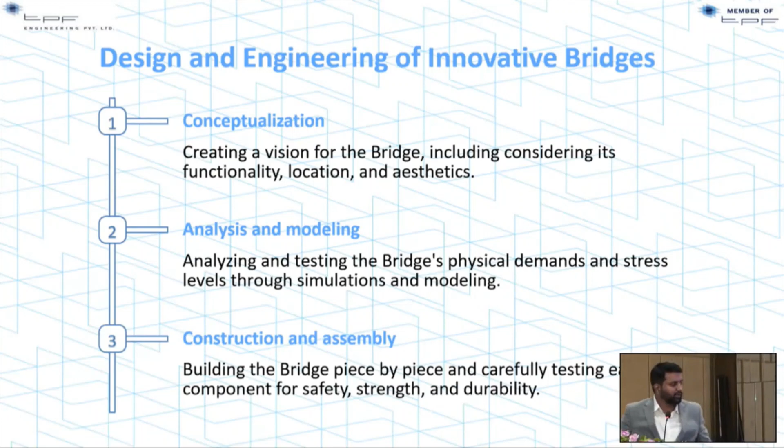Analysis and modeling is something a design engineer will start with an FEA model. We do the analysis and modeling, and consider how construction-friendly the design can be. That is the most important thing for a design engineer.

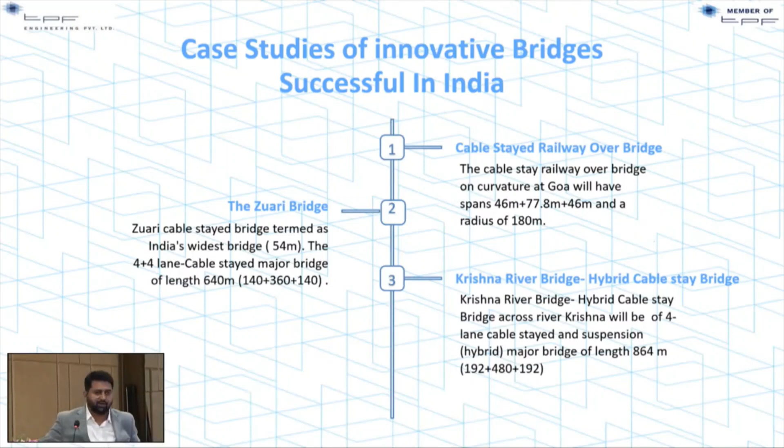So I will present 3 case studies successfully completed in India. The first is the Cable Stayed Railway Overbridge in Goa. The second is the Zuari River Bridge. And the last is something which has never happened in India, and we are the ones who are going to bring this technology to India.

For this innovative bridge, the client came to us with the problem of a live running track below and a first level corridor. They wanted to connect the southern part of Goa to the northern part with a ramp. So we came up with the innovative proposal of a cable stayed bridge. Any design engineer will understand that designing a bridge on a curvature is very difficult. We took up this challenge, and the bridge was constructed on a radius of 180 meters.

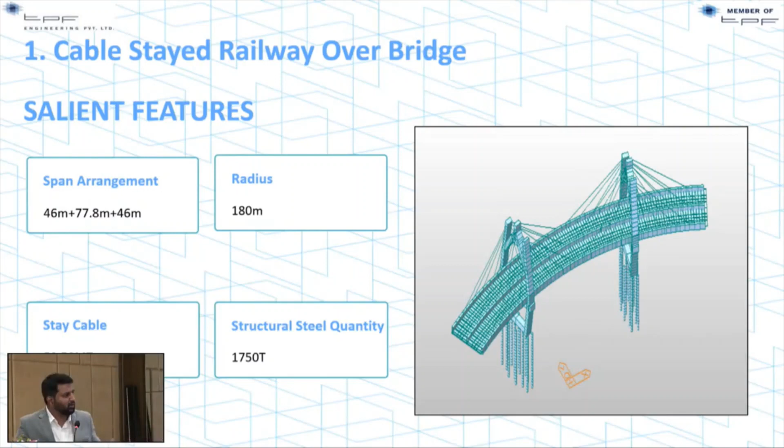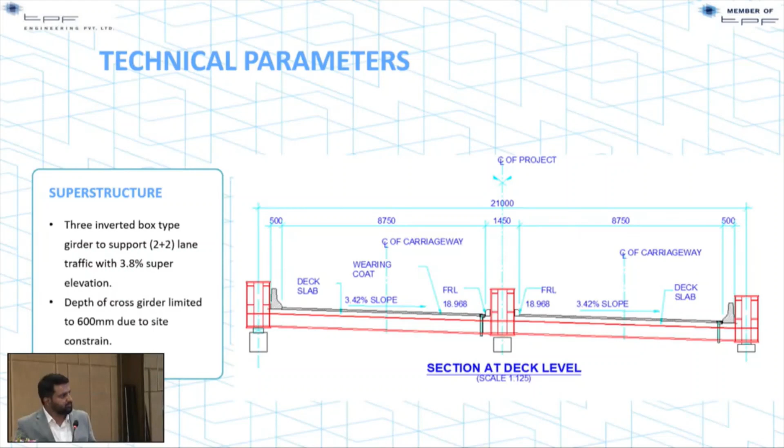The structural steel quantity was about 2,000 tons. From the aesthetic or innovation point of view, we provided a namaste shape to the pylon, which is a kind of pier. This is how the deck of the bridge was designed. Anchors are the most important parts of a cable stayed bridge, where the cables transfer the load from the anchor to the superstructure and then the substructure.

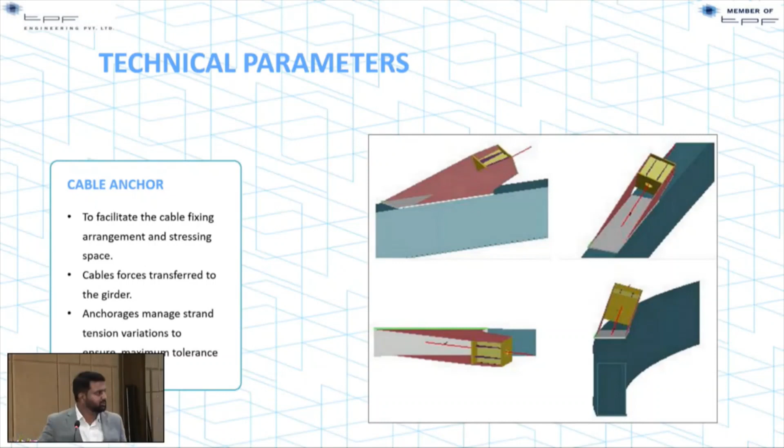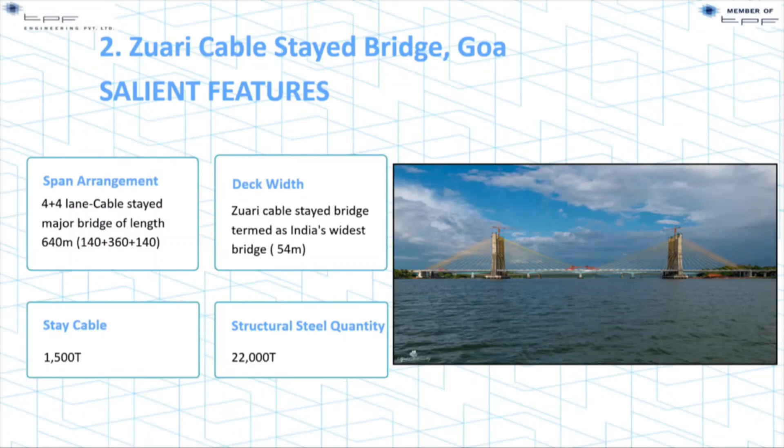the distance between the two pylons is about 360 meters. And the total length of this bridge is about 640 meters. So the structural steel quantity was about 22,000 tons, and the stay cable quantity was about 1,500 tons. The construction methodology, for a design engineer, the construction stage forces are very important. So due consideration was given to the technical parameters such as deflection, the structural steel weight, and the panels.

So the unique feature is that we were actually consultant on this project, but during the construction of the project, COVID happened, and the design consultant who was actually supposed to design this bridge was from Europe. He could not come back to India for completing the design part. So the Ministry of Road and Transport expected us to complete this bridge with the remaining design.

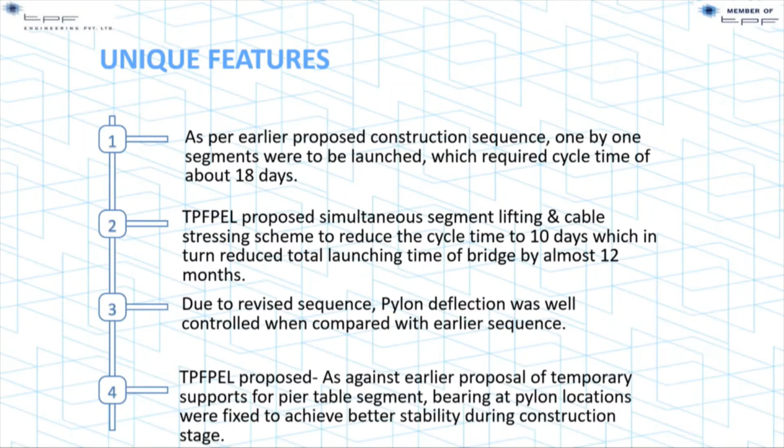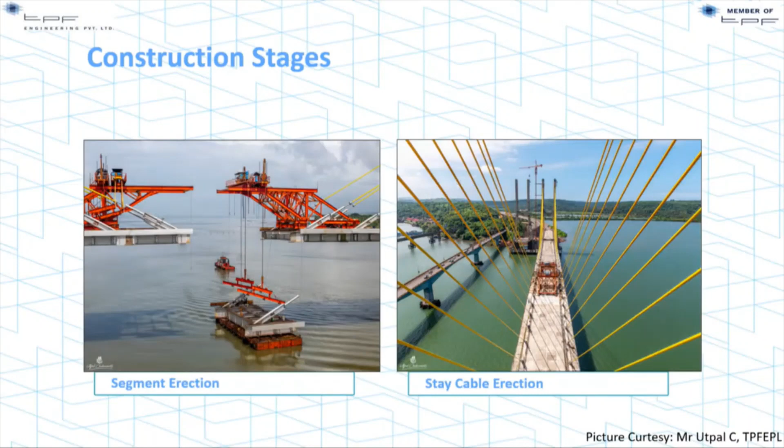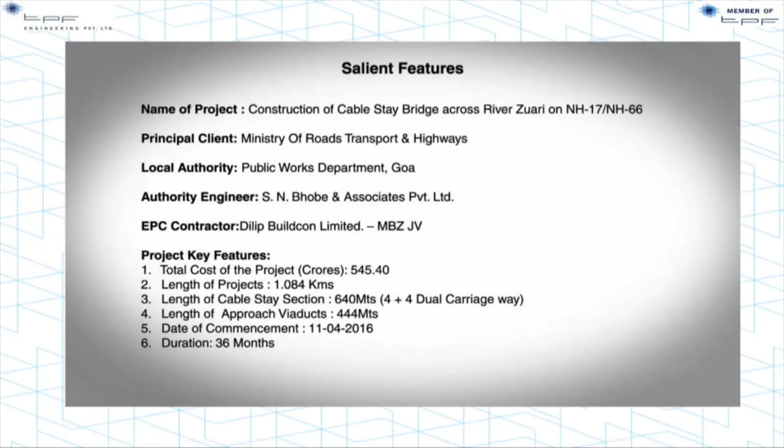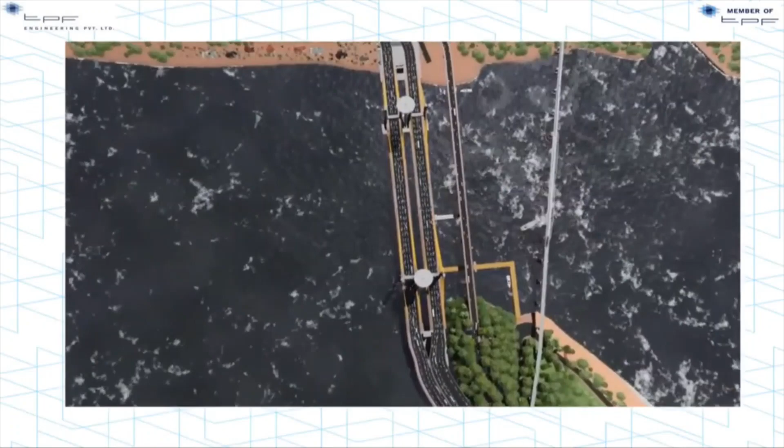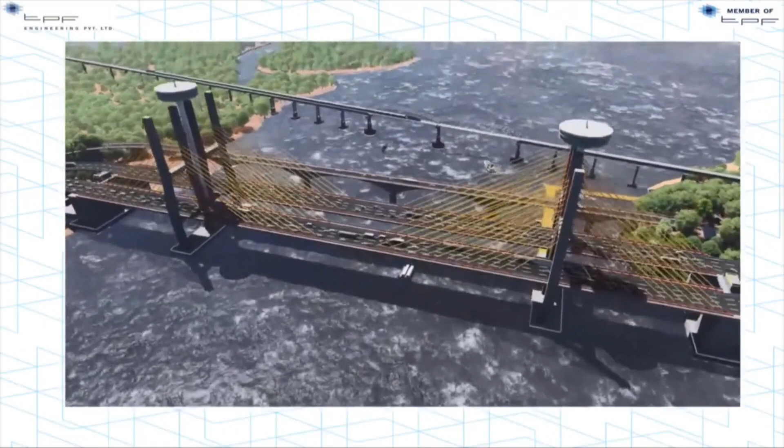I just wanted to run through the video of how the bridge looks. This is the river Zuari, where the southern and northern parts of Goa are connected. You see those pylons, the columns are of a height of 110 meters, which is about a 35-story building, just to get an idea.

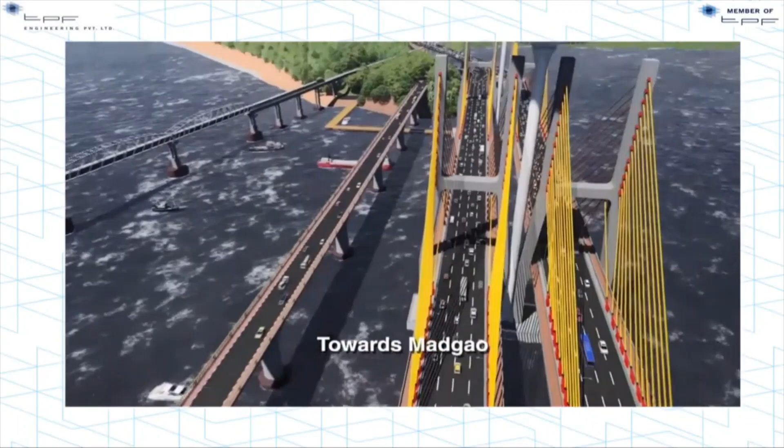On this bridge, from a tourism point of view, we have constructed a tower. The construction is going on at site right now.

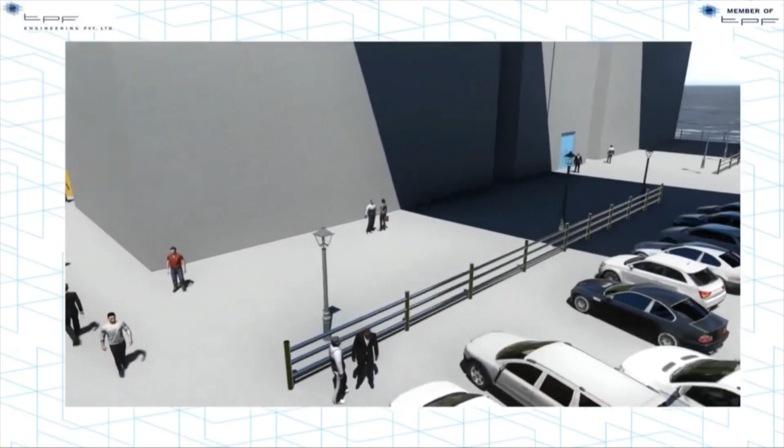So reduce volume, please. Volume of video.

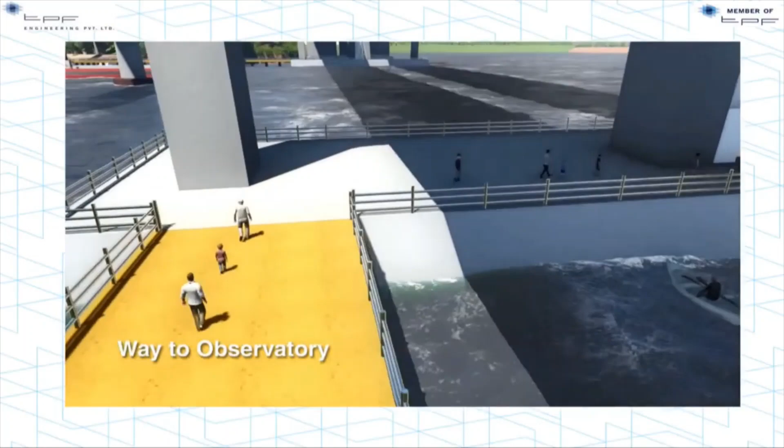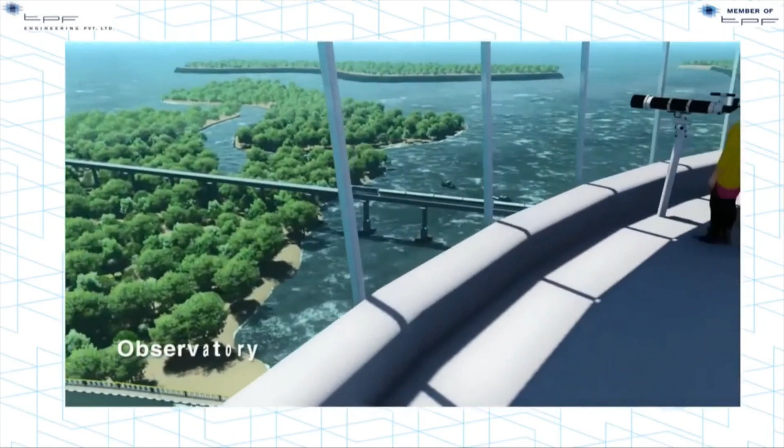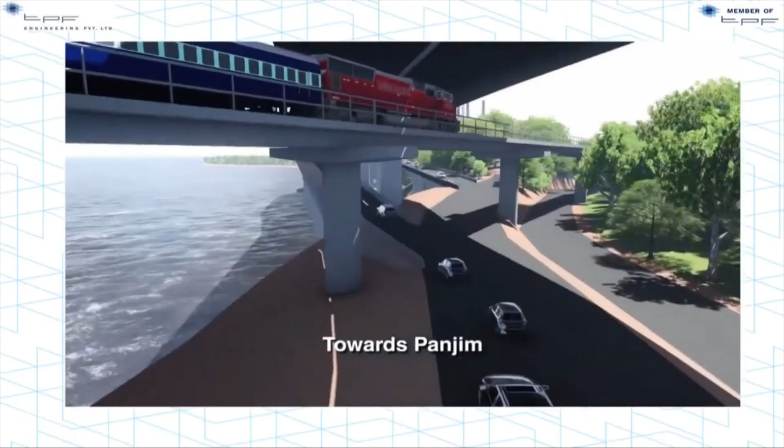Yeah. So for this, from a tourism point of view, we have constructed towers on this cable stayed bridge so that people can have a beautiful view of the sea. So this is the first time, we conceptualized this in 2017-18. So this is something like an innovation for any cable stayed bridge designer, so that during the construction you can have the viewing galleries also.

So, I mean, this is how the big bridge looks right now. Yes.

This is the bridge that everyone in Delhi is actually talking about in the Ministry of Highway and Road Transport. This is the bridge which is neither a cable stayed nor a suspension bridge. We wanted to push our limits because in India we have a cable stayed span of up to 360 meters, which I showed you earlier. Now with this bridge, we have gone up to 480 meters. So the distance between two piers is 480 meters, which was never done in India before.

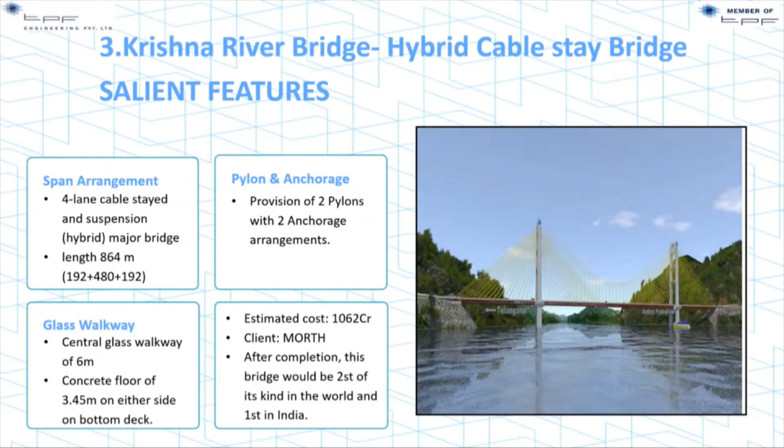So with this bridge, we have done a cable stay arrangement with a suspension cable. So it is called a hybrid connection of stay cables with suspension cables. The unique feature of this bridge is that you have two levels of service on this. On the deck level, you have vehicular traffic, and at the second level, you have a walkway, which is a glass flooring. So this is the general arrangement of the bridge.

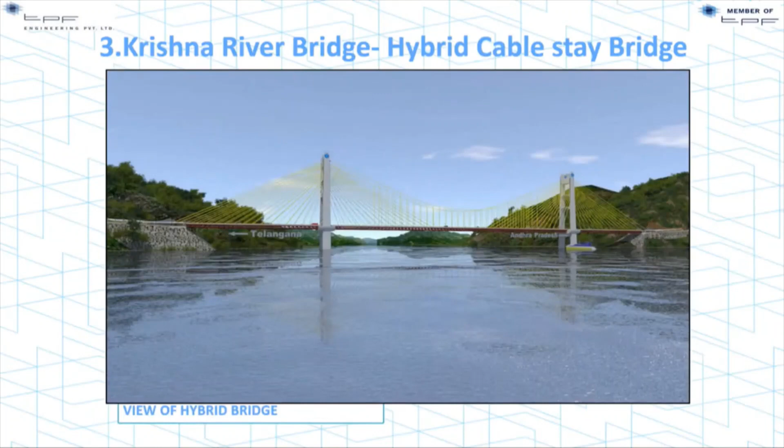This is how the bridge will look. We are in the construction phase now. A lot of detailing was done to simulate the local understanding of the people. So we wanted to innovate and give the pylon a Gopuram shape, which is a kind of temple in South India. We have a viewing gallery below the deck now.

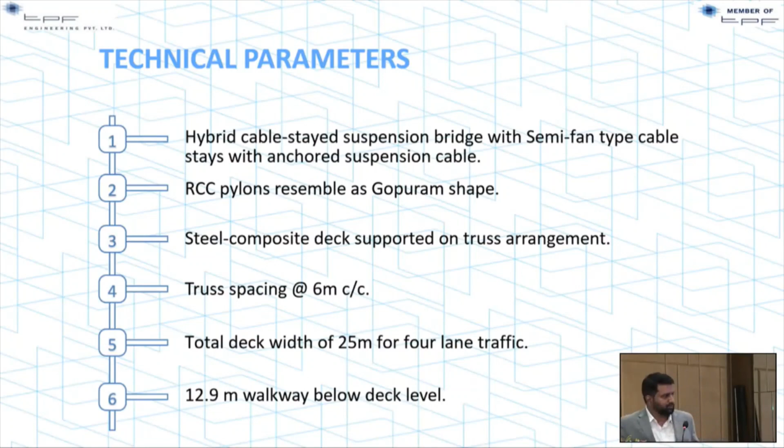So the technical parameters are, we have a semi-fan type of arrangement. This is an RCC pylon with Gopuram shape, steel composite bridge. We have a truss type of superstructure. This is how the pylon will look.

So this is what I was talking about, that we have a deck level at the first level. So this is where vehicle traffic will run through, and then right below it we have a glass walkway, and then there are the people who can walk on the sides. If somebody wants to enjoy the adventure, they can use that 6-meter glass walkway also.

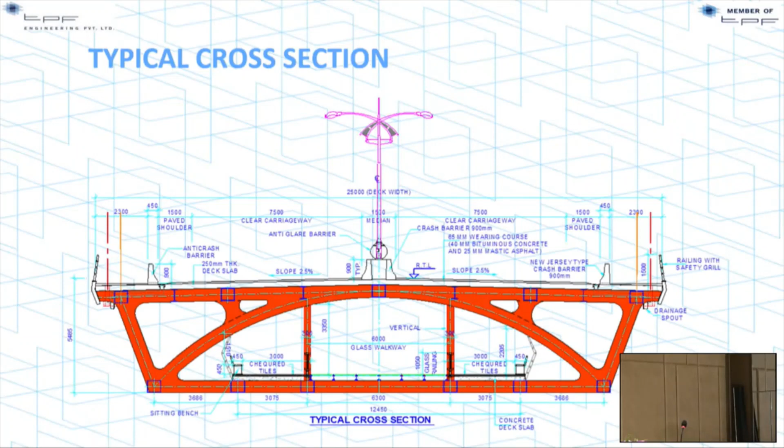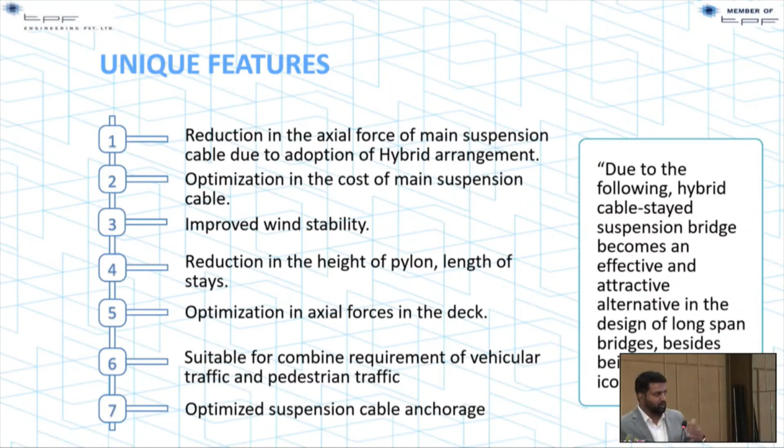Unique features of the bridge: we had compared this costing of the bridge to the earlier highest cable stayed bridge, and we found that there was reduction in the stay cable quantity. Then the improved stability for the wind considerations. Height of the pylon was reduced, because if you go with a 480 meter span, the height of the pylon could have been 200 to 250 meters. Because of this arrangement, we could reduce that to 175 meters.

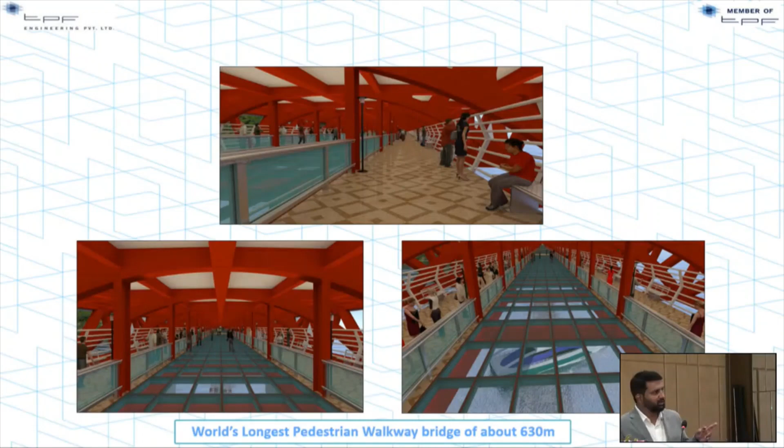So this is how the animated look of the bridge is, that we have a glass walkway at every 3 meter, alternate side, a 3 meter and then a 6 meter glass walkway. We have a small video of it also.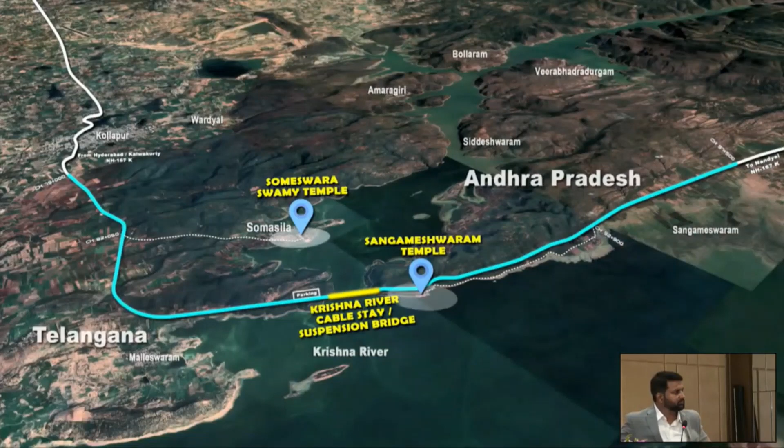Sprawling and serene Krishna River forms the border between the two states of Telangana and Andhra Pradesh. New National Highway NH 167K between Kalwakurty to Nandyal crosses the river Krishna near Somasila, famous for Sri Lalita Someswara Swamy Temple on Telangana side and near Sangameshwaram Temple on Andhra Pradesh side, through the proposed iconic bridge.

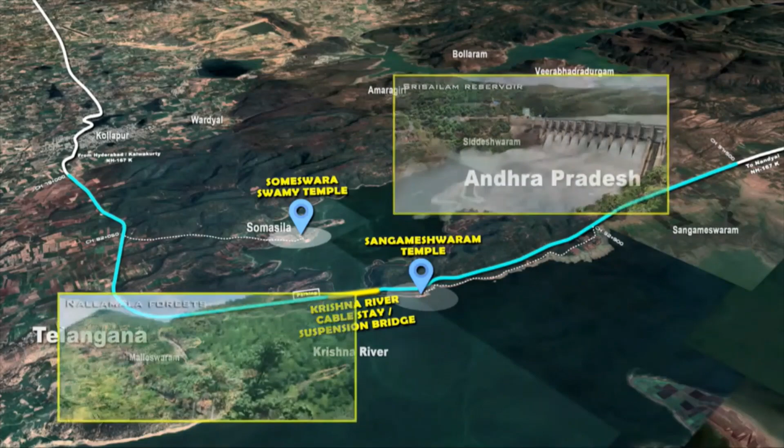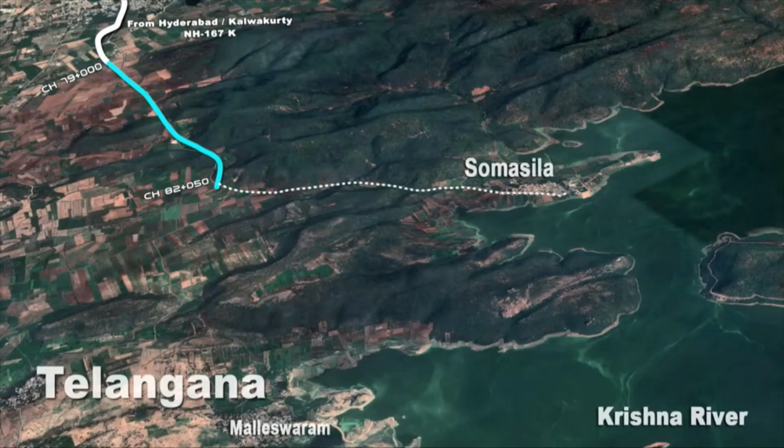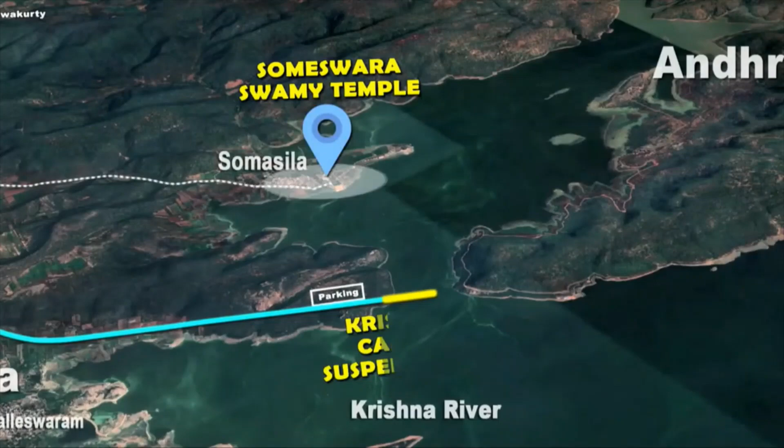The bridge is located in a picturesque landscape with sprawling Srisailam Reservoir surrounded by Nallamala forests and hills. This proposed iconic bridge would be the gateway for both the states and will help promote tourism besides improving connectivity. With this bridge, the connectivity gets completed, reducing the distance between Hyderabad in Telangana and places like Nandyal, Tirupati, Chennai, etc. by a whopping 80 kilometers.

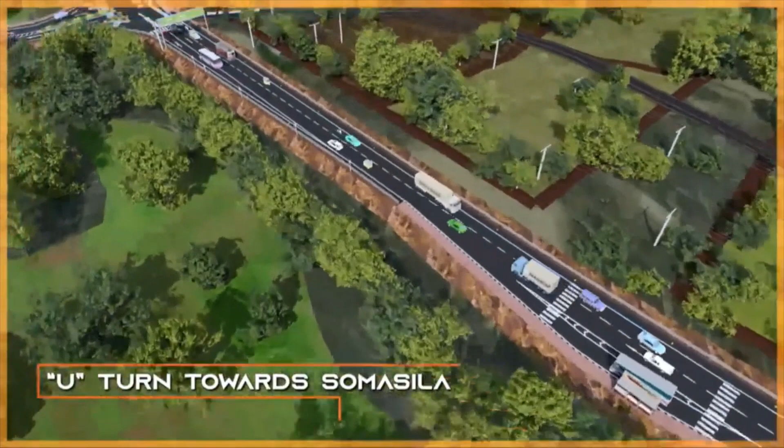When seen from Somasila, the bridge presents an iconic view, which is unique in its aesthetics. Appropriate junctions and lane reductions are designed to allow entry and egress from NH to Somasila Temple. On Andhra Pradesh side, also appropriate junctions and lane reductions are created to allow entry and egress from NH to Sangameshwaram temple.

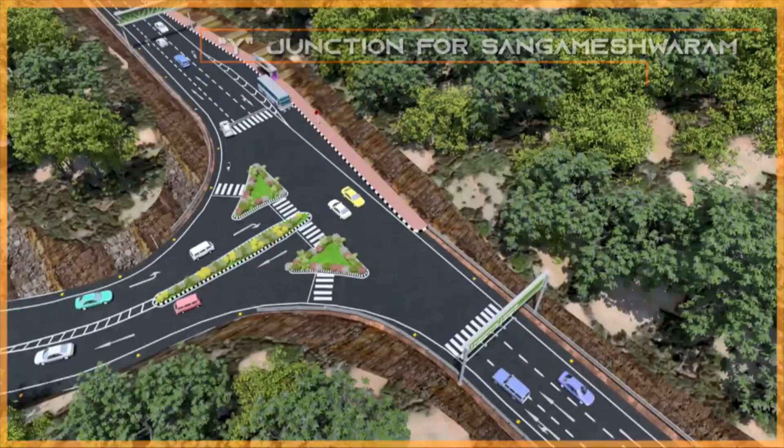The proposed iconic Krishna River Bridge is technologically unique with use of hybrid suspension cum cable stayed structural arrangement. Clear span of 480 meters between supports and balancing spans of 192 meters on either side. With clear navigational height of 30 meters, the bridge blends beautifully with the scenic surroundings.

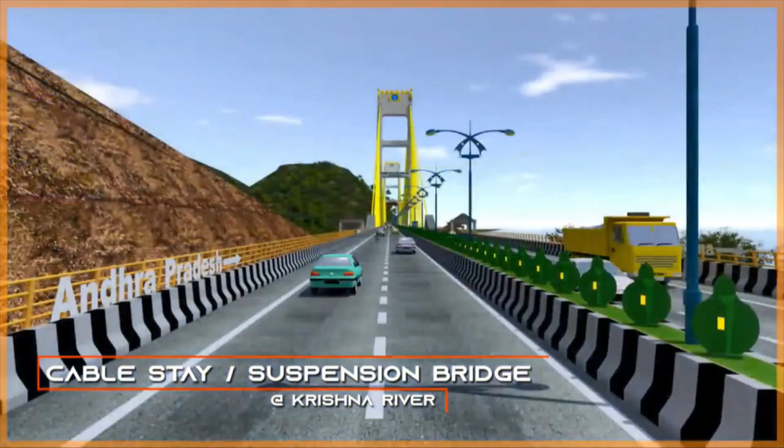The four-lane bridge welcomes you through the pylons, inspired by gopurams of South Indian temple architecture. The pylon rises up in a series of receding stories like the talas of gopurams. The top section also exhibits design resembling the gopurams of the South Indian temples. The Kirti Mukha inspired silhouette on two edges and one in center of the barrel in elevation displays the state emblem. Travel on the bridge across Krishna River in the midst of a scenic landscape creates a beautiful and long-lasting experience.

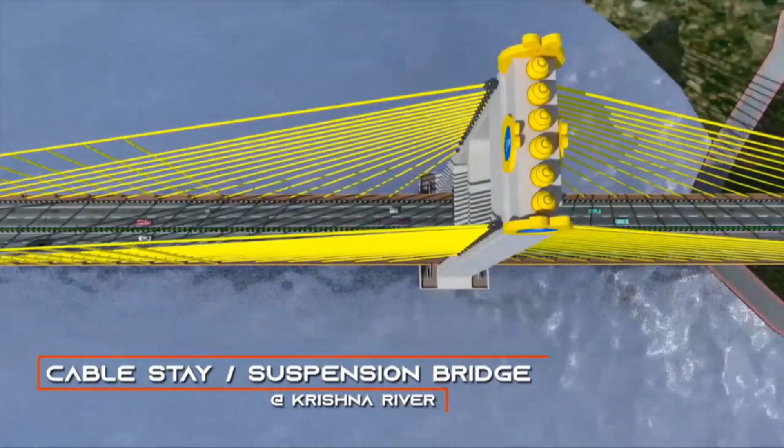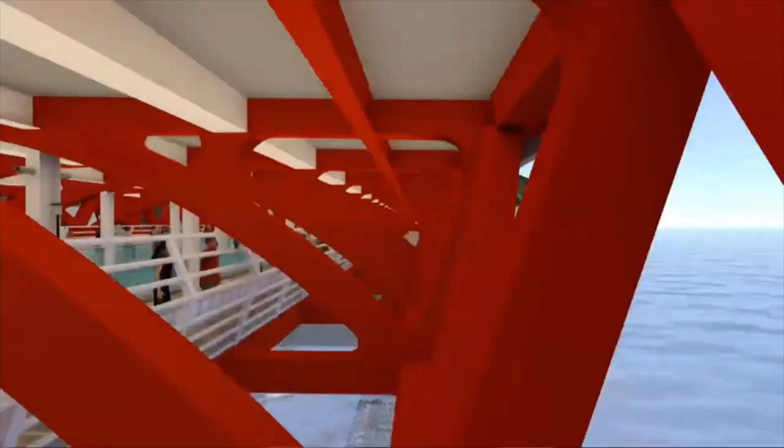Along the sides of the road, a ramp leads down to the pedestrian walkway below the vehicular deck. The box section of the road bridge is made into a series of arch trusses. The pedestrian walkway is 2 by 3.45 meters with series of benches for sitting along the length of the bridge. Full height protective rails on the edge allow pedestrians to enjoy the scenic river and landscape along with the view of temples. The space between the two pathways is a walkway with glass decking.

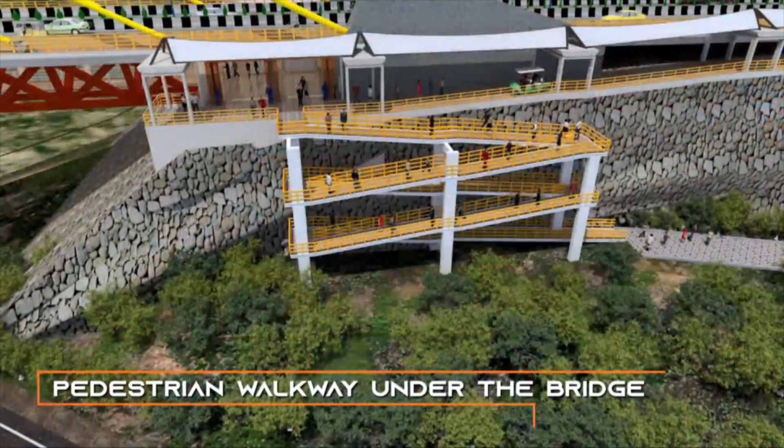This is the longest pedestrian glass bridge across a river in the world. This glass bridge provides the view of the Krishna River below. This glass bridge will attract tourists from all over as it is going to be an experience of its kind in the world. The entrance and exit points of this pedestrian bridge are also designed as gateways. The entire pedestrian bridge along with the entry ramps are physically challenged friendly, allowing wheelchair, electric cart movement between two ends.

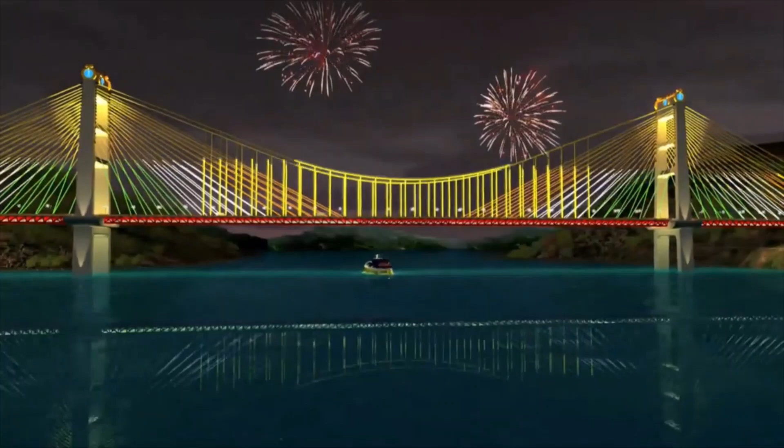When seen from Sangameshwaram temple, this bridge gives a closer look of the bridge form. The whole bridge is illuminated with special facade lighting to give travelers, tourists and pilgrims a unique experience at night. This combination of gopuram-like pylons and hybrid suspension cum cable stayed structural arrangement, the glass pedestrian bridge, all put together makes this bridge an iconic bridge, never done anywhere before.

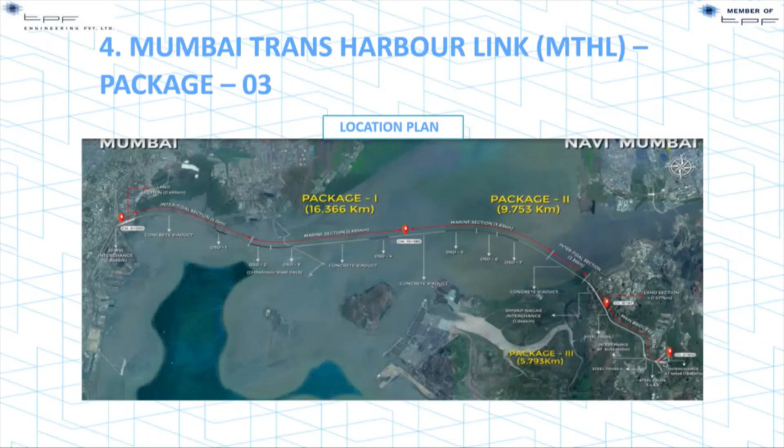So with this bridge, we have connected the two state boundaries, the Telangana state and the Andhra state. Now, I would like to brief you about the project which is going to be opening shortly in Mumbai, which is the longest sea bridge in India, about 21.6 kilometers, a sea link. This is how the bridge looks, which is in Mumbai.

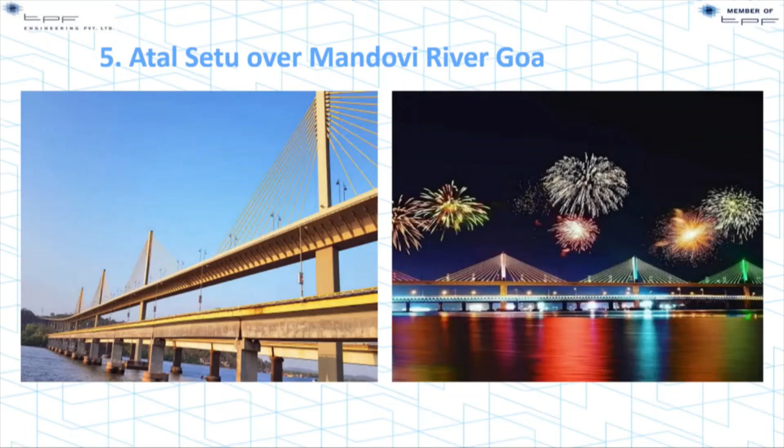Then we completed this Mandovi cable stayed bridge in 2019. MG Setu in Patna, we were the consultants for this project, which is again an iconic structure with 120 meter trusses. The longest bridge in India till now is Bhupen Hazarika Bridge. We were again the consultants for this bridge, and this was one of the iconic structures of India.

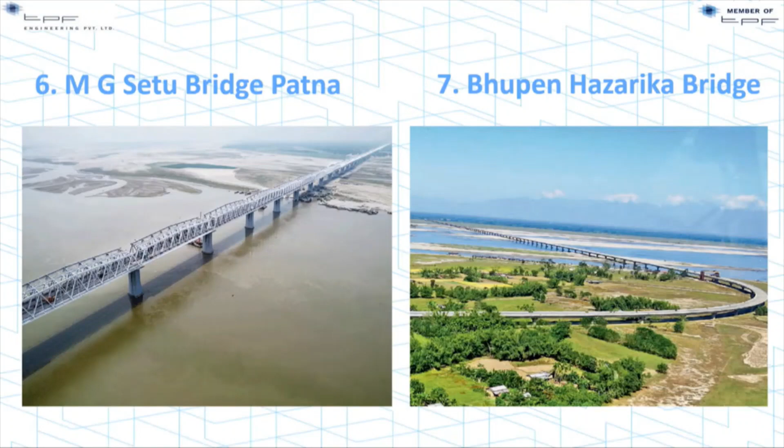Now we'll discuss the future possibilities of innovation. So we think about smart infrastructure. Smart infrastructure means that we need to have sensors which can predict the behavior of the structures during the functional life of the structure. Sustainability: the bridges should adopt eco-friendly measures like solar panels and energy technologies to reduce the carbon footprint. Use of artificial intelligence is more important these days, wherein with the help of AI we can provide real-time feedback to the commuters on the traffic and weather conditions.

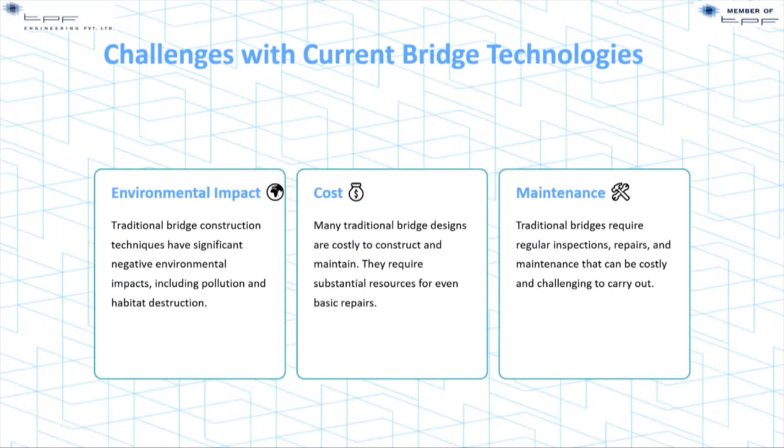Challenges with the current technologies, as design engineers, we feel are the environmental impact, the cost and the maintenance of these innovative bridges. The later part of this session will be handed over to Mr. Pankaj, who is going to discuss sustainability in bridges.

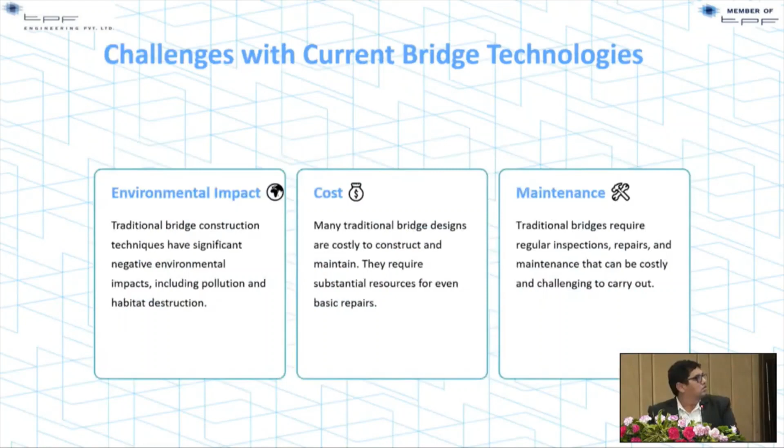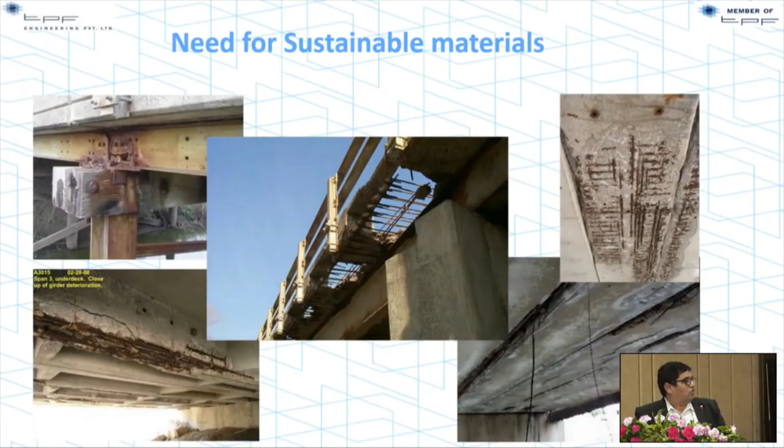The need for sustainable materials. You can see the deterioration of the conventional bridges. So for that we need the technology of sensors. You can bring in the sensors and check it here, and you need not wait such a long time for it to deteriorate and then go and inspect the bridges. The various deteriorations have been seen here.

In sustainable materials, I am concentrating on hybrid composite beams. For hybrid composite beams, I will take you through the technicality, its construction and its benefits, like in transportation. The engineering theory behind the HCB is that we are using the arch analogy. It's a very unique technique. It has not been brought to India; we, as TPF, are bringing this.

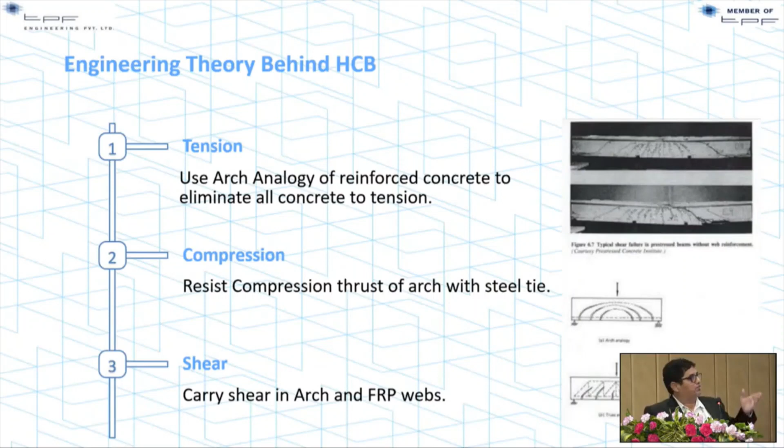Tension uses an arch analogy for the reinforced concrete, eliminating all the concrete in tension. Compression resists the compression thrust of the arch with the steel tie. And the shear is carried in the arch and in FRP webs. Now, what are the FRP webs, the compression thrust, and the steel tie? I will show you in the next slides.

The HCB spans can range anywhere between 6 to 32 meters. It is proven outside the USA and all. We are also trying to make it up to 40 meters.

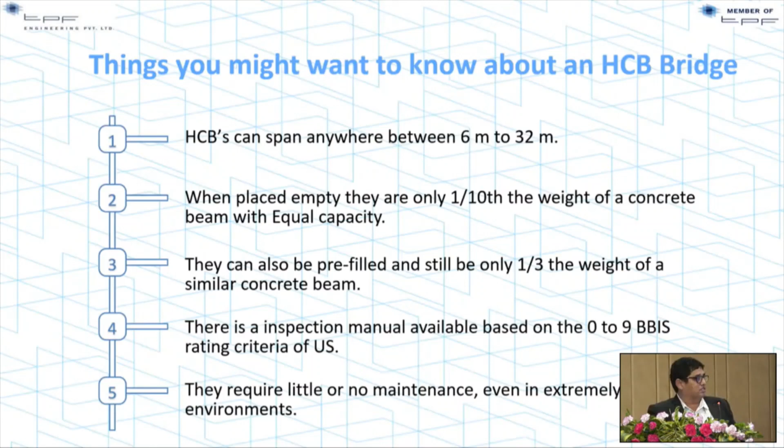This is an inspection manual available based on the 0 to 9 BBIS rating criteria. They require little or no maintenance, even in extremely aggressive environments.

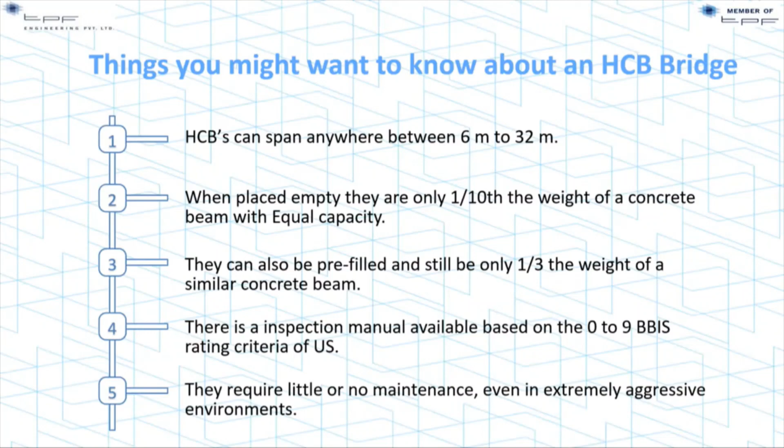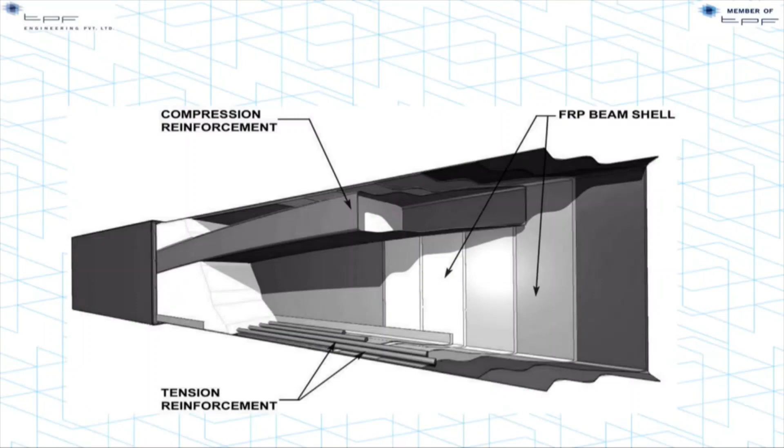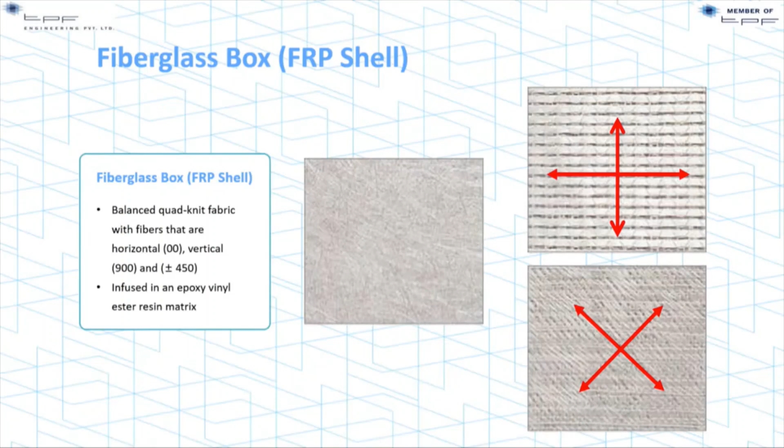The FRP shell consists of fiberglass laminates. The laminates also come in three types: one is horizontal, one is vertical and horizontal, and this is the cross one. But a balanced quad-knit fabric with fibers that are horizontal, vertical, and cross are more useful in this type of girders.

These FRP sheets actually consist of 4 or 5 sheets. By tubing, we infuse the resin into that, and we can make it as one monolithic shell.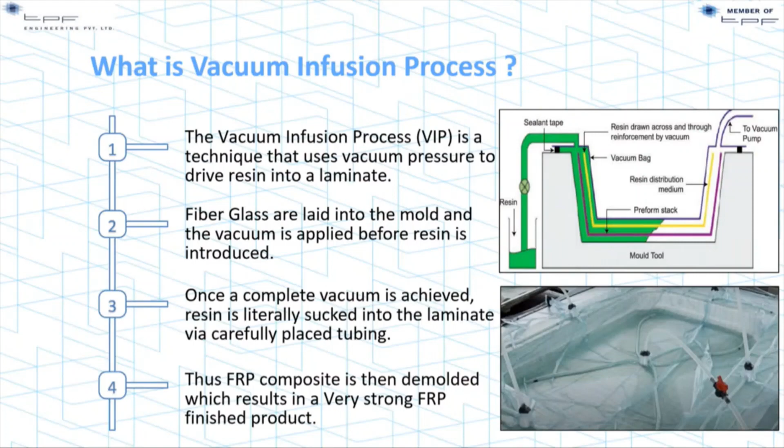This is a steel sheet used to fabricate the molds. That means, before infusing, as per the design and drawing, this is the outer mold, and we put it inside the mold, then we infuse the resin in this.

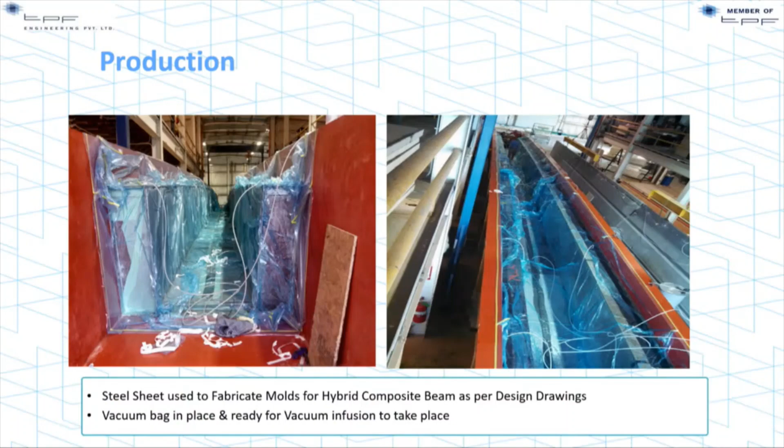This is the top lid. After casting this, the top lid is there, that we have to put on top. That is also done by infusing the resin into the fibers and laminates.

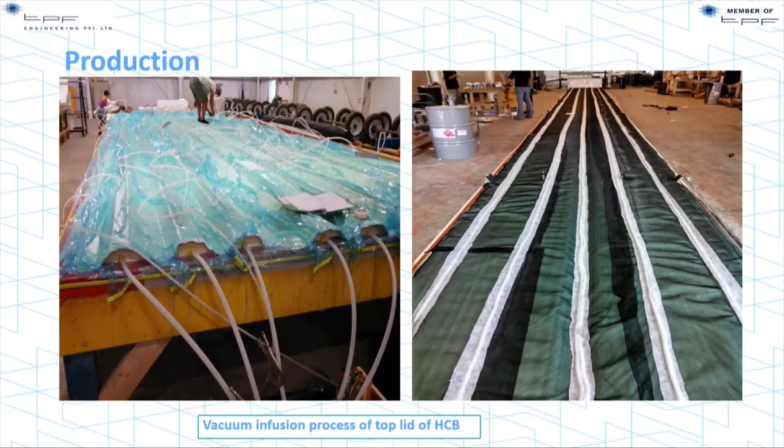These are the 4 stages. The Polyiso foam being placed inside. Second one is the beam, as per the design we have to put the laminates and make a shell. And the vacuum infusion process is done. And fourth one is the HCB girder ready for dispatch.

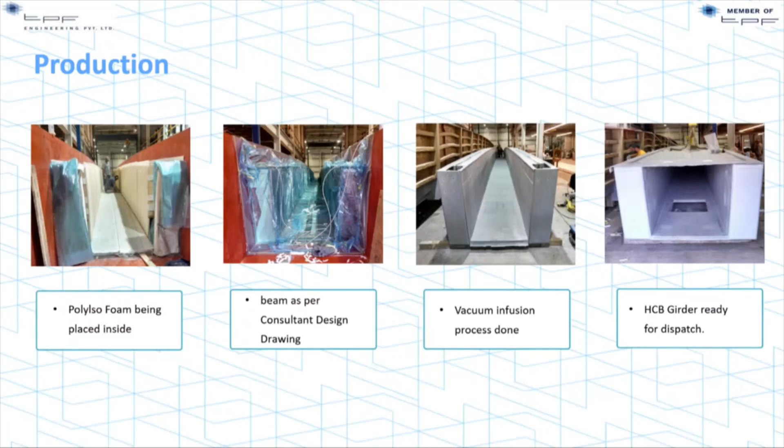In this, we can use small cranes also. Just I will show you later on the benefits of the HCB technology. It is lighter in weight, reduces the carbon footprint, optimization of every material use, sustainable, simplicity in the design, fabrication and erection, provides the public safer bridges, and reduces the burden of infrastructure for future generations.

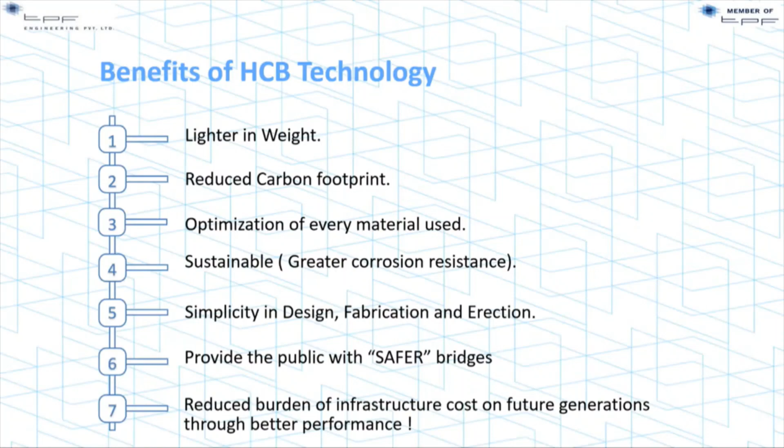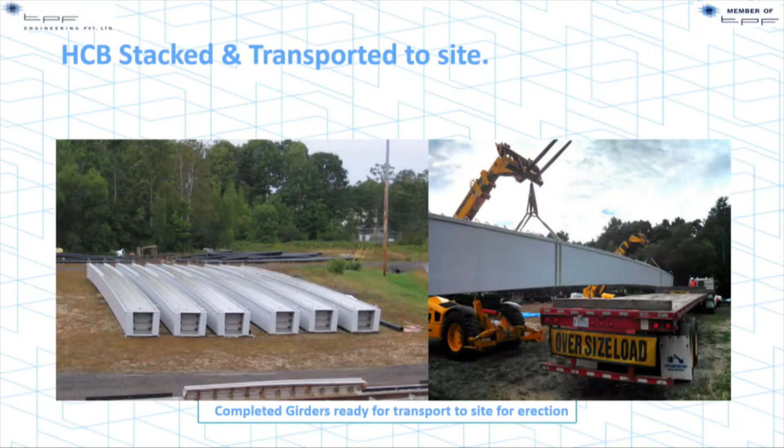You can see here the beams are so compact and very easy to load. You can see here the Farana crane, and the Farana and Hydra crane can be used to just lift the girder and place it, because it's only 1/10 of the weight of the conventional concrete girders.

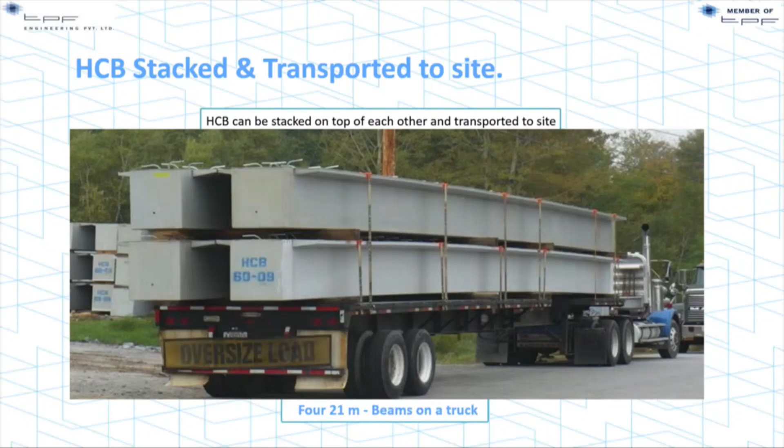Here in segments, actually we are able to transfer only one segment. Here we can transfer 4 beams at a time. Again, the unloading is also very easy. With a small crane, we can unload it. This reduces the risk factor, because heavy loading and transportation is a very big problem and very risky, and we have seen that many accidents are happening. So it is very useful for reducing that.

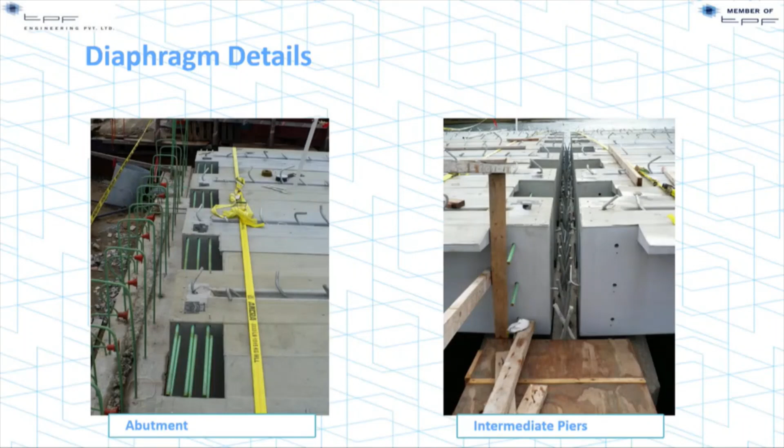These are the photographs, the cast-in filling, you can say. Again, these are the casted diaphragm shown. These are the exact views of the constructed bridge from the bottom.

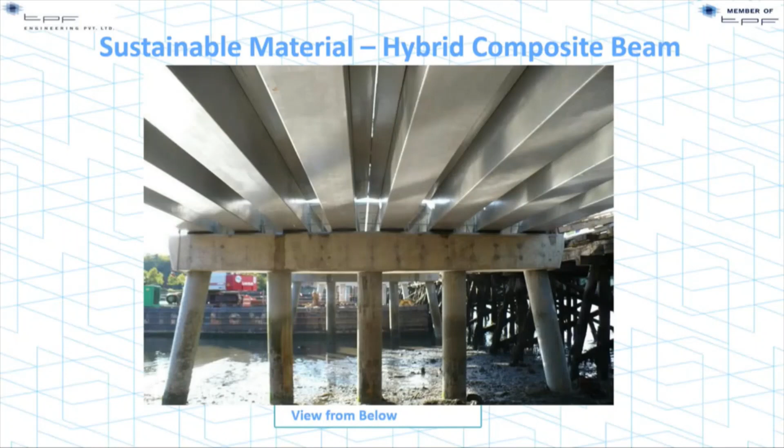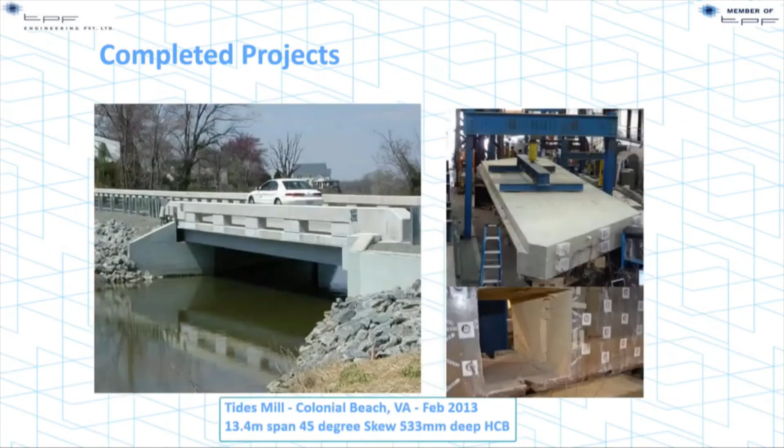This is the load testing by the BNSF railway bridge. This is the already casted bridge, completed. Again, you see that it's a very small amount of effort required for this, to just unload or place the girders.

The benefits of sustainable bridge technologies: it's a cost saving. Sustainable bridges can be cheaper than conventional ones to construct and maintain over the long term, reducing overall cost. Environmental impact: by using sustainable materials and renewable energy technologies, sustainable bridges have a much smaller environmental footprint. Here, because of lesser transport and lesser cranes, lesser amount of machinery is required.

Increased safety: since heavy loading and unloading is not required and heavy transportation is not required, major launches are not required. So it's very good for safety. And improved aesthetics: sustainable bridges can be designed to be visually stunning, creating landmarks, because it's only laminates. We have to mold it and place it into resin.

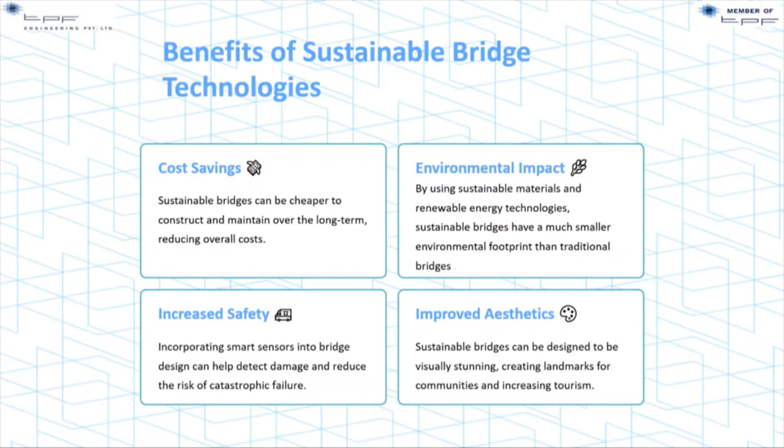Conclusion. Bridge technology has come a long way since the early wooden planks and the pointy arches. Today we have state of the art engineering marvels that defy gravity and expectations. As sustainable bridge technologies become more mainstream, costs are likely to fall, because in coming years this type of HCB technology will come.

It will reduce weight, cost, material, and directly help the environment also, because natural ingredients may require less as compared to our conventional girders or structures. Secondly, it reduces - as I said, it's only 1/3 of the weight of conventional girders. So the dead load of these girders is less, so the dead weight of the superstructure gets less, so the substructures and even foundations also get reduced. So overall, it will be even more economical than conventional bridges and easily maintainable also.